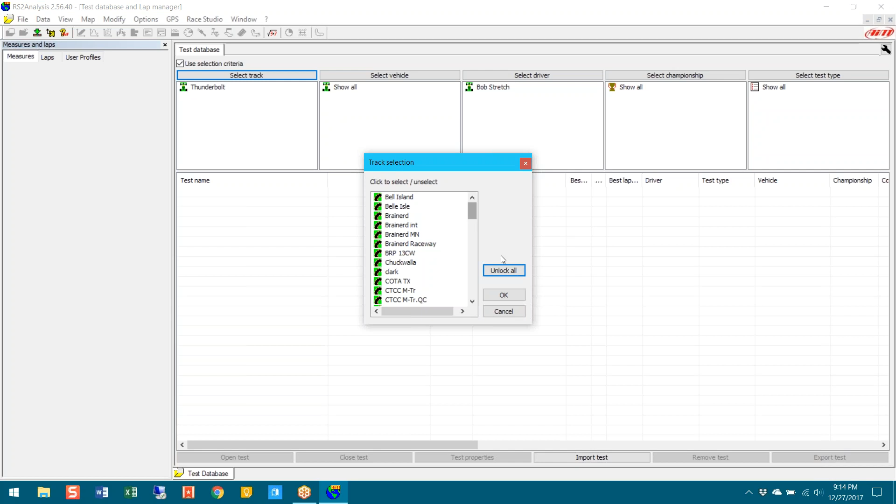The next part that I use a lot is this Use Selection Criteria button. That lets us really use the database function of the software, where we can go in and select a track. We're going to say unlock all of them, so we can start out clear of everything, and say we want to look at Watkins Glen. We say okay, then we don't have a vehicle selected, we say unlock all, pick my name, and we can see all the tests where I've recorded data when I was the driver at Watkins Glen.

What's pretty nice is when the column titles come in, you go, hey, what was my best lap at Watkins Glen? We look at it and we see 1:23. I know for me running the long course, that was never attainable because I don't have an Indy car. That one was actually a time the car broke and I took the NASCAR shortcut. But we can say my best lap there was a 2:14. And then we can jump into this data to analyze it later.

So this is just kind of a quick overview of how these areas of the software work and things that we can do with it. The other part I wanted to touch on quickly is one of the nice things we can do from this screen is right-click on a file and choose to email it.

So if you do that, it'll automatically open up your email program, and it comes up automatically with the AiM software email address. So it would send it back to Italy if it was a file you had a problem with that you wanted them to look at, or you can delete that and send it to a friend or whoever you want to share that data file with, and it automatically attaches all the files that you need with it.

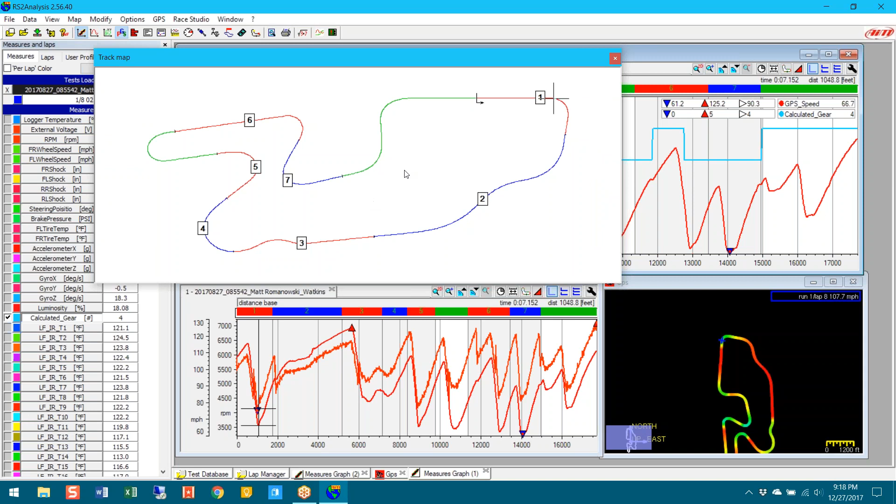And when we want to see that map, the way we do it is we go Map and then Show Track Map. And that'll pop up our map with all our segments. And we can scale that. And as we make it bigger, the numbers will show up on the map for us. Oh, that's always a tricky one. Where did it go on us? So we can see we have our first segment, second, third, fourth, fifth, sixth, and seventh. And we have our numbers that correspond to where that segment is.

This is a little bit of an art in itself, and we'll talk about that. But this is the segment as I drew it up, and I wanted to segment the track. For different tracks, I might have 2 or 3 segmented maps because I might want to focus on one area or one particular section. So sometimes if it's a track that has a special chicane, I might have 3 segments: the chicane I want and everything before and everything after. And then that lets me really hone in on a spot. And then I might have one like this that's split up a little bit bigger.

So the map and the segments become pretty important, so we can get to the segment analysis part. But I wanted to go through the screens of how we make this map if we didn't have one. So if we go to a track for the first time and we pull it up, we can say make a new map. And this is the map that AiM says fits this track. And we can see it has a lot more segments. Here's start finish. The little tick mark off to the side says that's the direction of the track.

And we see this one has, I don't know how many segments here. If we count, there's 12 segments. And they don't all make perfect sense. But Watkins Glen's a track where it works pretty well. And we go, well, this isn't too bad of an analysis, but we don't really get the entrance to the bus stop very well.

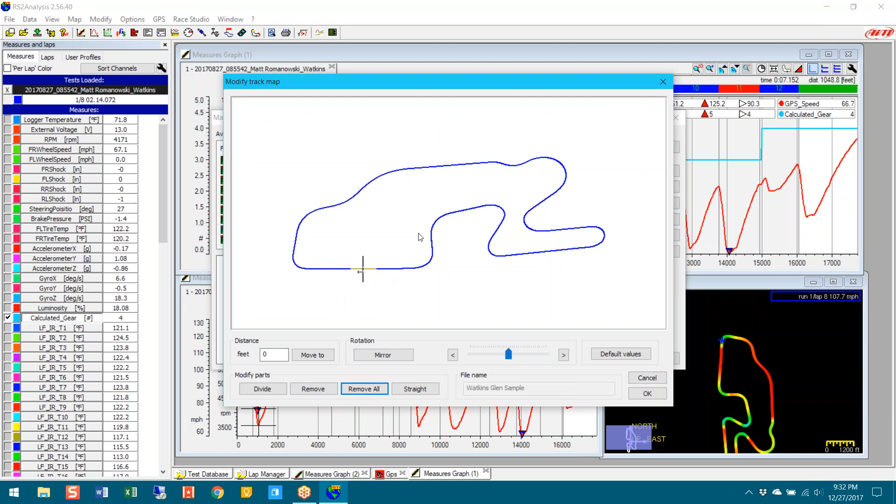We can remove a section, we can remove them all, start over, and do whatever we want. Or, here where we say, hey, we don't want to save this, we could just cancel it. We can also, when we get into the map manager here, do some nice things. We can come in here and say we can load this for all the open tests. So if we had 3 Watkins Glen tests that we wanted to look at, we can load this for all of them. We can delete a map, modify it as we talked about.

We can mail a map off to someone. So if you were prepping for an event or doing some post-race analysis and you wanted to share it with someone, you can mail it off. You can export it to save it if you want to attach to an email that way. We can import maps from someone, and we can jump into the map folder. So this is really kind of the map manager window and the different ways we can use it. And then the last part of it is we can say to just show the track map if we didn't have it open. And it goes through and it gives us all of our segments.

Are there not good maps available? So Mark's question, are there no maps available?

Maps, you can use the ones that AiM automatically generates, or you can use your own. For a little bit, I had hosted a number of maps that people had made, and they'd email them in, and I'd share those for people. But what I found a lot of times was people want their own, or if you want to focus on a specific spot in a track, people make their own.

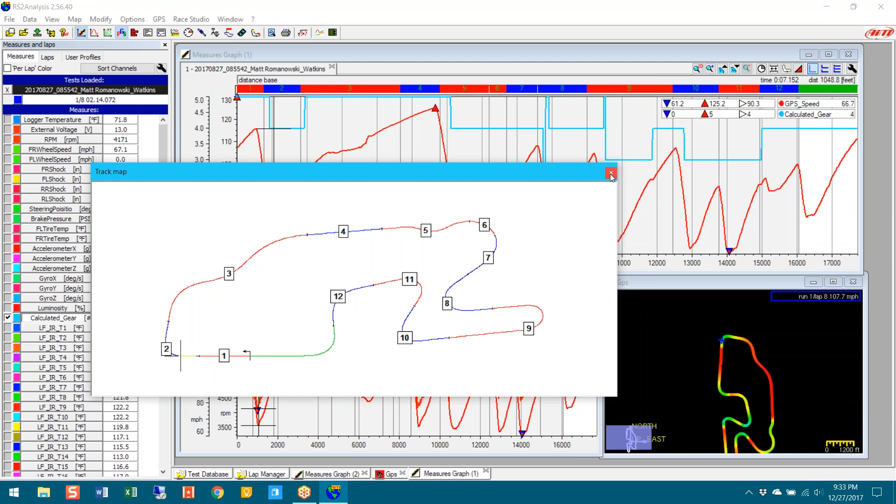And with the GPS, it becomes pretty quick to make them, and the maps are a lot more accurate. So I don't know of anyone that shares them a lot or kind of hosts them for everybody anymore. So you're kind of stuck making your own if you want something more specific than the general one that AiM gives you. So sorry, there's not too much more to help with that part, Mark.

The area where this comes in, and it's actually not something I have in my notes, but I think it's important because we just talked about what we do with these to make all these segments, is the segment analysis. We can do this a few ways. We can go to view and then down to the segment analysis, which I'm missing. This isn't the way I usually jump to it. So it'll show up in track line split times.

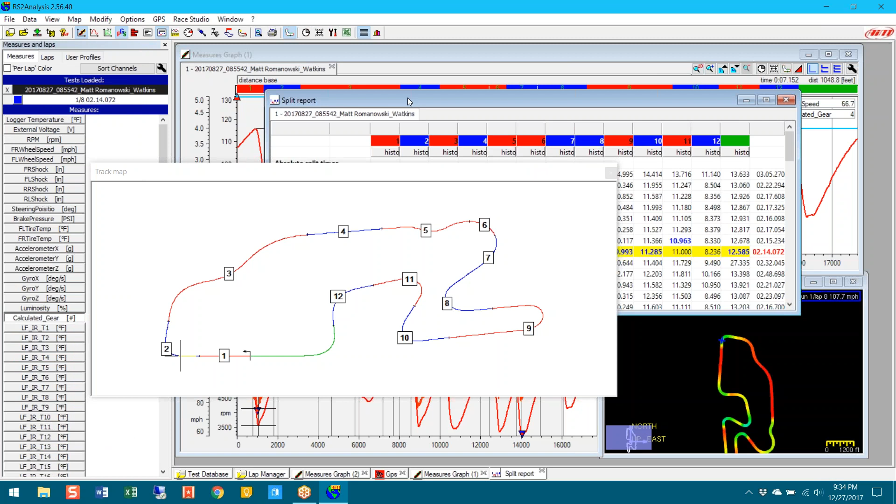So when we open up our split times here, let's just close that map. This gives us all those splits for that whole session. And there's a lot of data here, and this is a spot where we're going to jump into another webinar one day on how to get into this segment analysis much deeper. But what we see is if we show our track map here, this segment 1 is our segment 1 here. Segment 2 is turn 1, and we see it here.

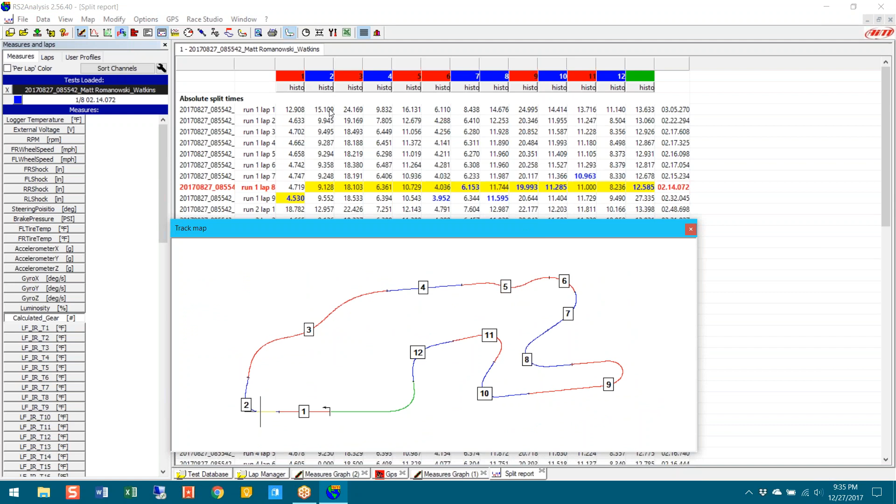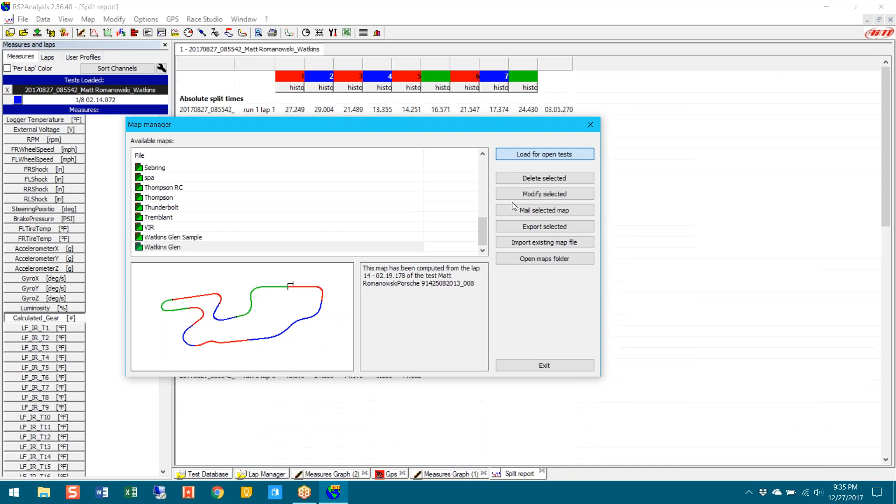So this is the way that we get to go through all of our own segments, and this is where the data shows up. And just to give you a quick example, if we wanted to open a different map and apply it, we're going to close this for a second. If we just look for a real easy one, we see it's 12.9, 15.1. When we load a new map, it recalculates all these and changes them to whatever that map file was. So now we see it went from 12.9 and 15.1 to 27 and 29. So you'll see different numbers as we change those segments.

And to give you a quick example where this becomes important, we can go in here and we're going to remove all our segments. And we're going to say, hey, we want to look at something really specific, maybe we want to focus on just the bus stop. So we're going to divide the track here and here, and we're going to change the color.

So now we're going to say we have the bus stop and everything before and after, sort of like the t-shirt that says racing is life and everything else before and after doesn't matter. Or here's our chance, and we're going to call it Watkins Glen bus stop.

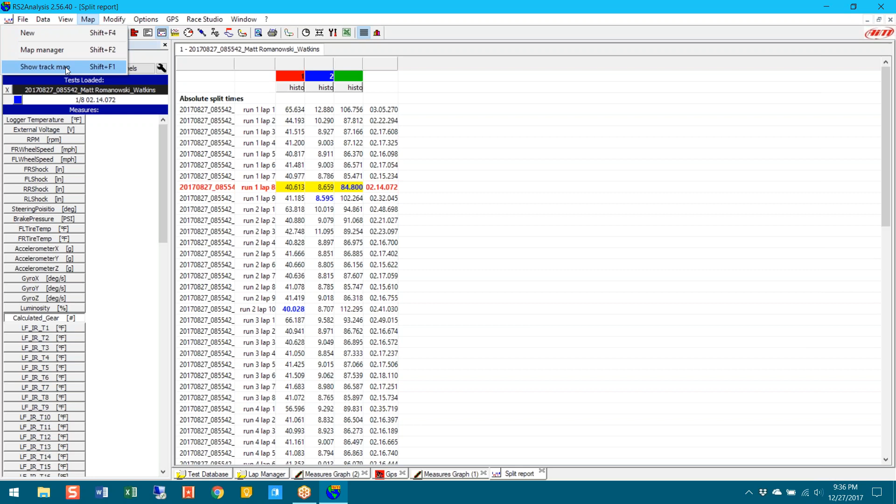So now if we open up that map again by going to map, show track map, we can see all our bus stop data. We can see there's some pretty big variance in here. We go from the fastest, which is highlighted blue by AiM, the 8.595. We got one that's 10 seconds, so 1.4 seconds slower, and we got an 11. We see some pretty big variance in here.

So it's a chance that we could really hone in and go, well, geez, what's different about the bus stop in this lap versus some of these others? Because it says our average was 9.199. So what do we have to do to go from 9.2 to consistently run basically an 8.6? This is the power of the data, where we can really dig in and figure out what's different. If we have a SmartyCam hooked up, we can jump into this session and say, hey, what did it look like when we did that versus some of these others?

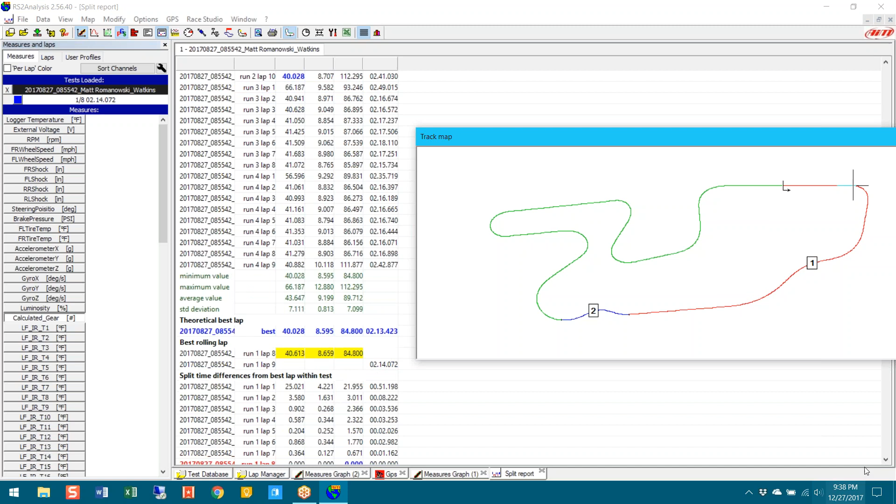We can go back and look at the brake point and the speeds and all those things to figure out what happened. So I don't want to get too deep in that tonight and take all our time there, because segment analysis is certainly going to be something we're going to focus on at another point, but I wanted to show where all of this segmenting ends up and where it's important.

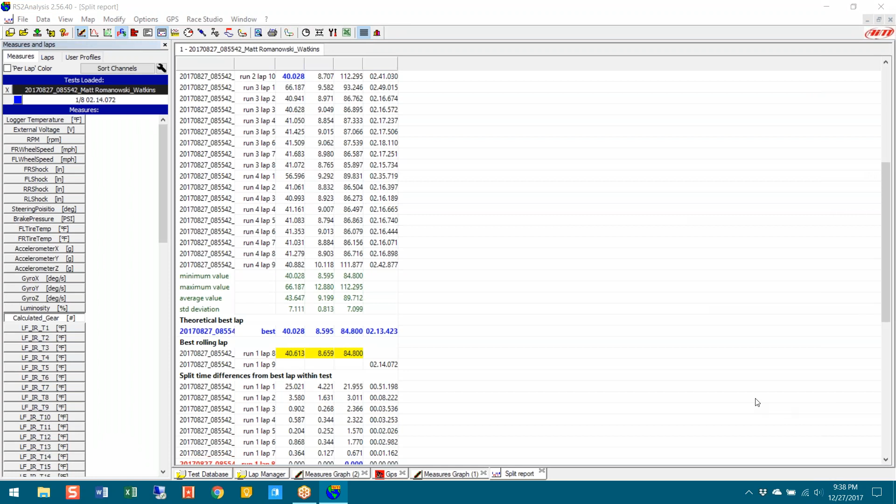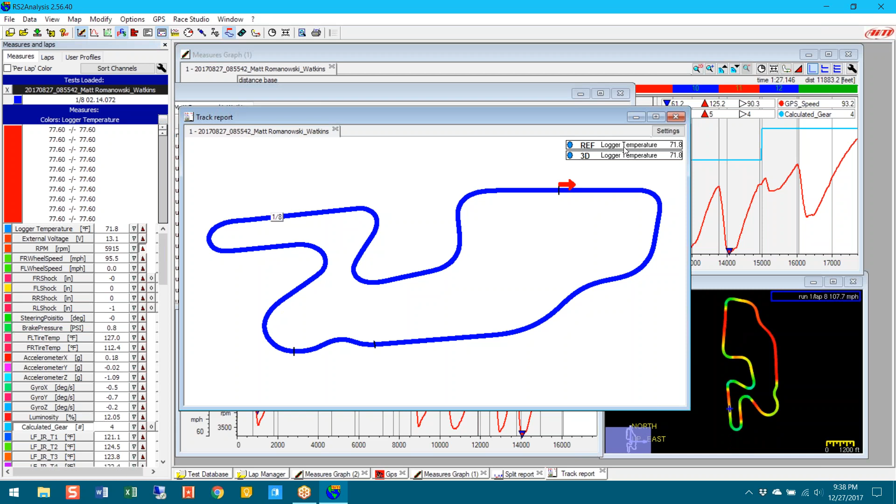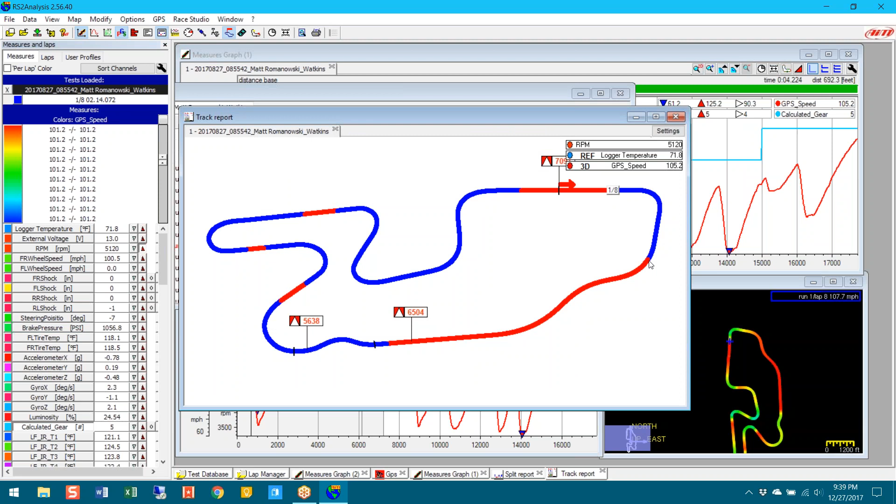The other quick spot I want to show you is when we look at our track report. I'll highlight that up here, the track with the little flag on it. When we open that up, and let me get this down so we all see it, is this track report, which we're not going to jump super deep into, but when this logs a value that we're going to look at, and let's just change these from logger temperature to say speed quick, is these spots where it can give us a value, and these breakoffs come from that segment map.

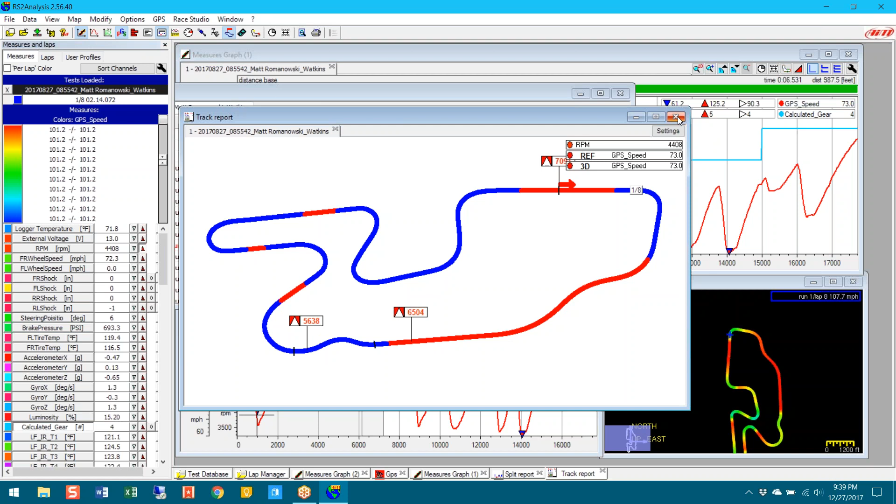And looking at it quick here off the cuff, our reference channel is what was throwing us off a little bit, but we can see that these flags that pop up are based upon the segments that we made before. That's where they come from. So it's another spot where that map does end up mattering. So I think that gives us a good idea of segments, and if people have more questions on that, type them up and we'll try to cover them tonight, or if we need to, we can do a whole other session some night on just the segment part.

But the next part I wanted to jump into was the Traqmate integration, because Traqmate now is no longer making systems. They're not selling anything. I've heard that they're repairing systems that are in the field, but I haven't heard of anyone sending them in. But one of the things that happened as they stopped making systems is that AiM purchased the rights to those data files and the file system and how it's constructed and everything else.

And what that ended up meaning is that we can now import a Traqmate file into AiM Race Studio Analysis, so we can compare it to an AiM file and look at it. So that really provides an opportunity. If somebody switches from a Traqmate system to an AiM system, or if they have a friend that was running Traqmate, they can import that data as well. And the way we do that is pretty straightforward. We go to File, and then we come down to Import a Traqmate file.

And I saved one to my desktop tonight, so we can go in. It's not showing up. I must have saved the wrong one. So let's see if we can find it quick, because I could remember where it was. Very good. Documents, data. We should have. All right. Here's an old file, and we won't dig into it, but we'll see how this works. We can pick one of these Traqmate files. Oh, we got one with an error.

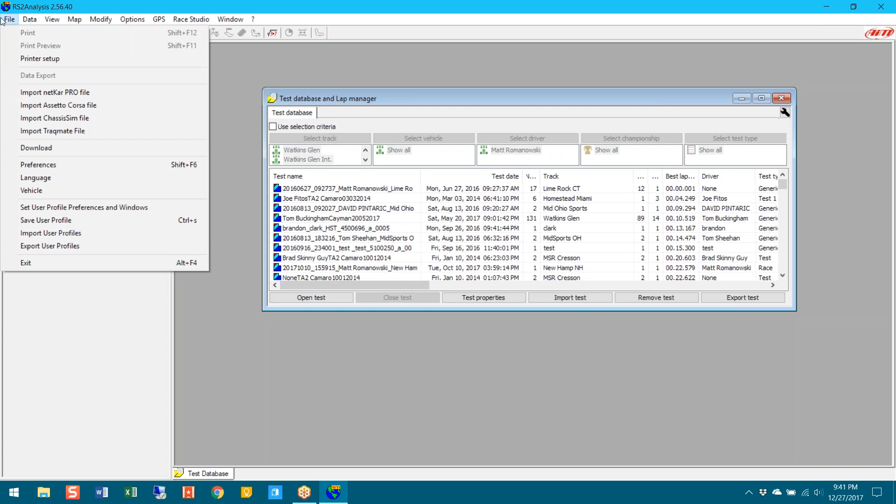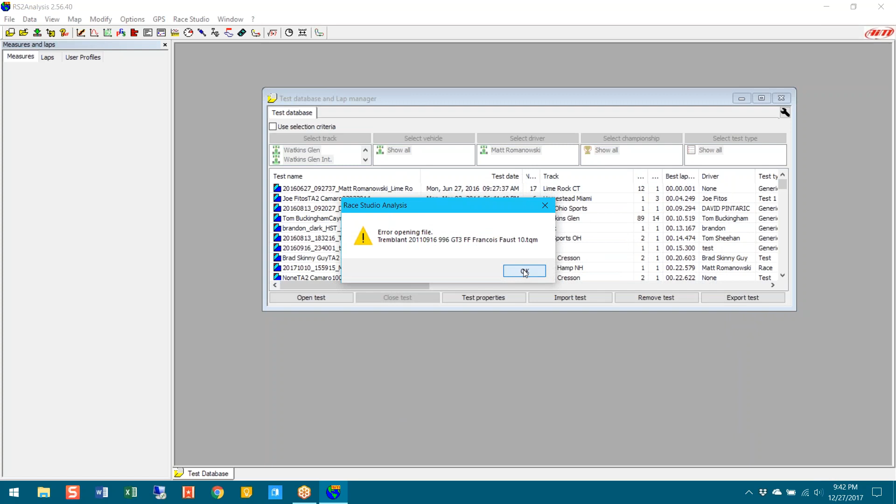So my plan tonight to show you this without double checking is backfiring a little bit, but we'll try another one and see what we can get for you. Hopefully we get one to work. It's worked in the past. It's not something that I do real often, but it's something that people are starting to use more and more. And I know Roger's had success with it in the past, and I've had it work before. So it's interesting that we're having some trouble, but we might not be able to show you, but you see the process of how to do that tonight. So sorry about that. If somebody has some files they want to try that with, or they have any trouble with, please send me a note and we can work on that.

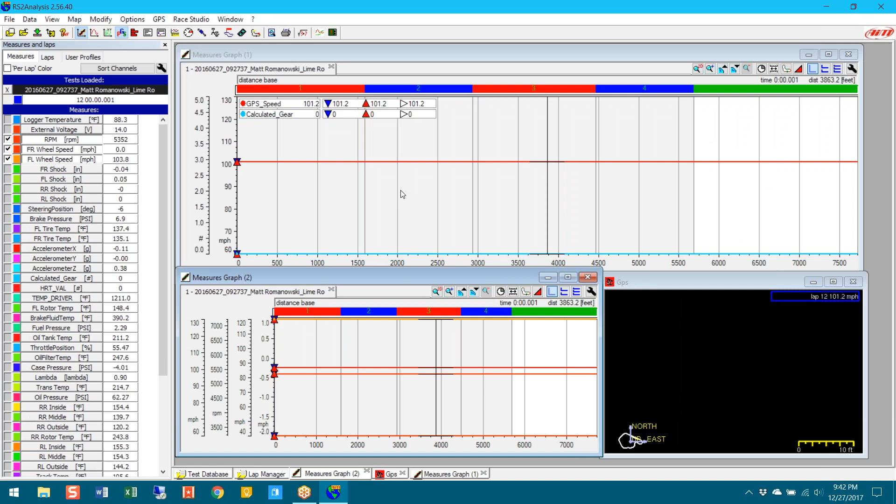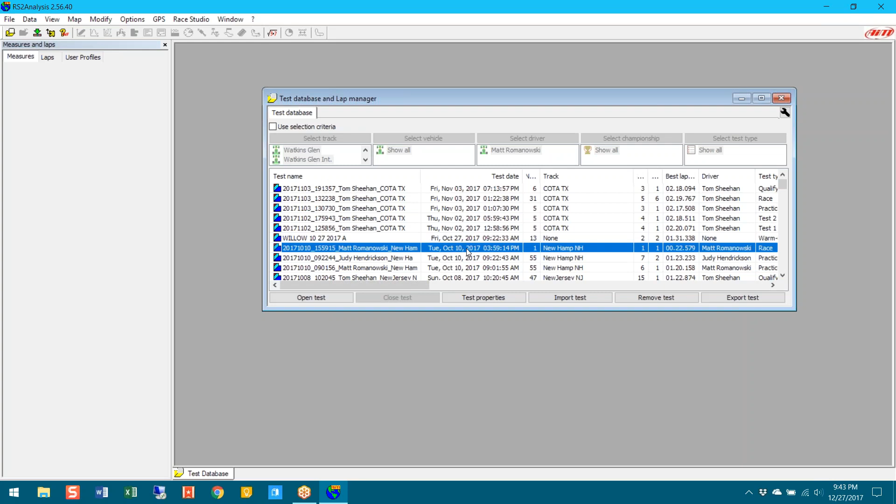Then the next thing I wanted to look at was an intro to the math channels and how math channels work. So I'm going to go in here and open up another one of my data files that's from Lime Rock. And this one, I don't know if I picked a good file. We can go back, use my favorite method of moving data around. We can open up a data file. We get some speeds in here. Oh, I'm failing on picking good files for you guys. Here we go. So now we have a better one.

We have our speed trace, our gears here, and we say, hey, we'd like to look at some math channels with it. So the two ways to get to math channels is to go to modify, or we can click the little square root button up here. My default, I always go to the button. And when we open up the math channel file, we get this window.

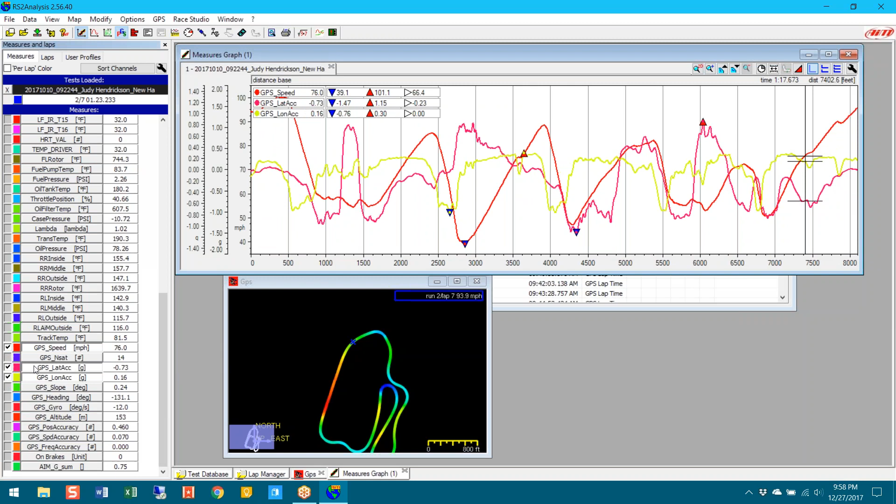So if we go in and we check these boxes, well, now we have a scale that we can look at these graphs. So we know a lot more now as we can say, well, geez, this is the amount of G-force that we're able to develop. But it's still kind of hard because all the graphs are overlaid.

Now what we can do is we can use the views up here, the three buttons that we have with the backwards L's. The first single one says that we're going to take all the graphs that we choose over here and put them on one graph. This is nice if we're looking at one or two things. Sometimes even with two, and certainly with three or four, it becomes too much information in one spot.

So then we can use the next one. Actually, I'm sorry, the third one. And that will put everything on its own graph for us. So no matter how many items we start adding, it puts them all on their own. This is a great way that we can display more information and have it all in a way that we can see and use. So we say, hey, we add more and more channels.

Here I put the altitude because sometimes that's a good measure of if the track's going up or down, and the topography that we're driving through. And with the Solo, if you have it plugged into your car, you'd even have an external voltage that you could look at and see. So we say, well, geez, this is pretty nice because now we have all these graphs shown on their own. And now we can really look at it and compare the points and do everything.

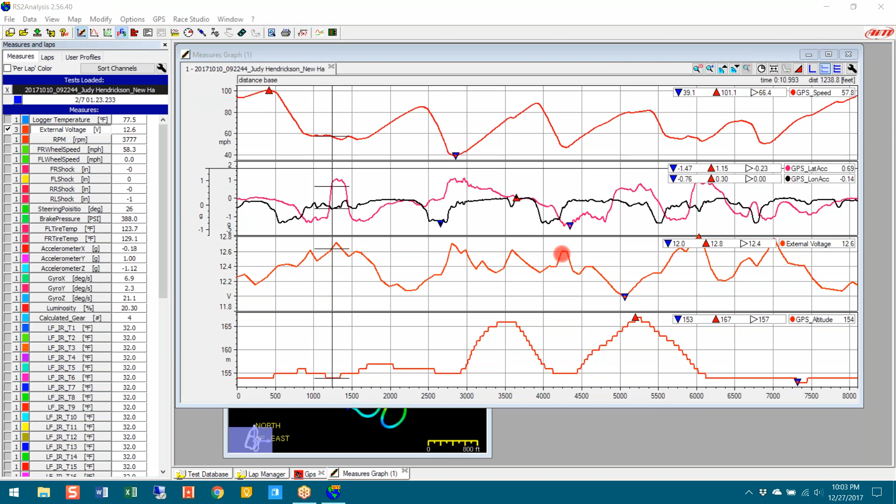Oh, yep. So the L's, if James has this right, is the L's up here, where we see right here. I refer to the L's, it's the views, that's what sets the 3 ways to go. So when we click those, the first one again is everything in one graph. And Mark, if you were comparing multiple cars or multiple laps, as Mark had put up, we're going to change this again for a minute.

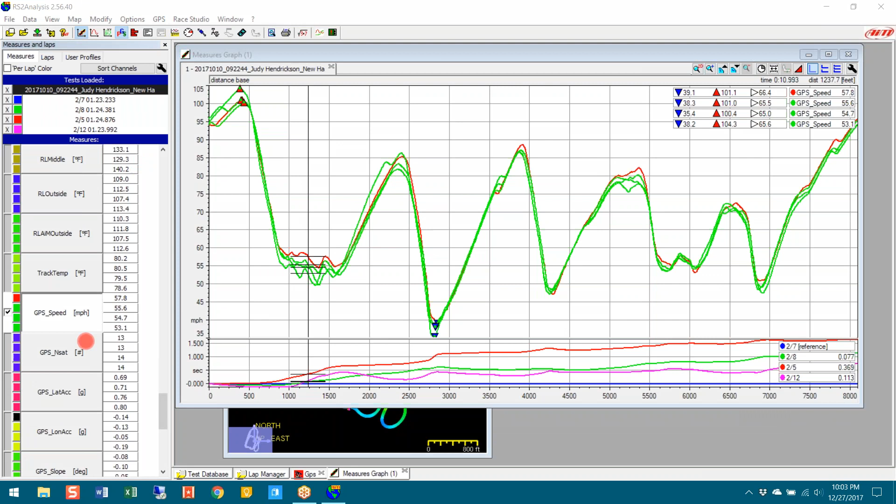Mark said when he does it, he changes the color of the graph to match the car. So what I'm going to do is just pick a couple laps here, and we're going to kind of go Mark's way. And I think that's a really good note of how to do it. Now when we pull up our speed, as we pull up multiple laps, we see them up here, and we see all the colors here. So we can go in and edit each lap's color.

For some reason, people probably laugh when I do it. I always end up with red and blue, because those are the colors that have good contrast to me. But any color works, and now we can see that we have all these graphs overlaid from all the laps, and if we had multiple sessions, we could have multiple cars and everything else set up. Right now it's just laps, and this is where we can dive into the data later on.

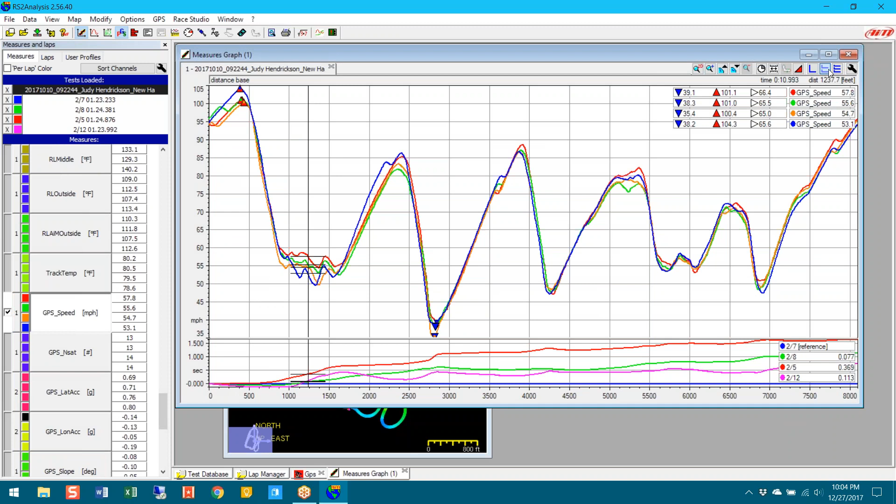And then when we go back up here to our view icons, the second one, I think, is where Mark had asked. That actually won't show up with this because we have all the same channel. But if we picked the accelerations again, it would go back to what we had defaulted, or we can put them all on their own.

So these views, again, when you get in there to your data, really get into these buttons and use this to your advantage to figure out how you want to display data to really look at things. It's one of the most powerful things that people don't use enough, I think.

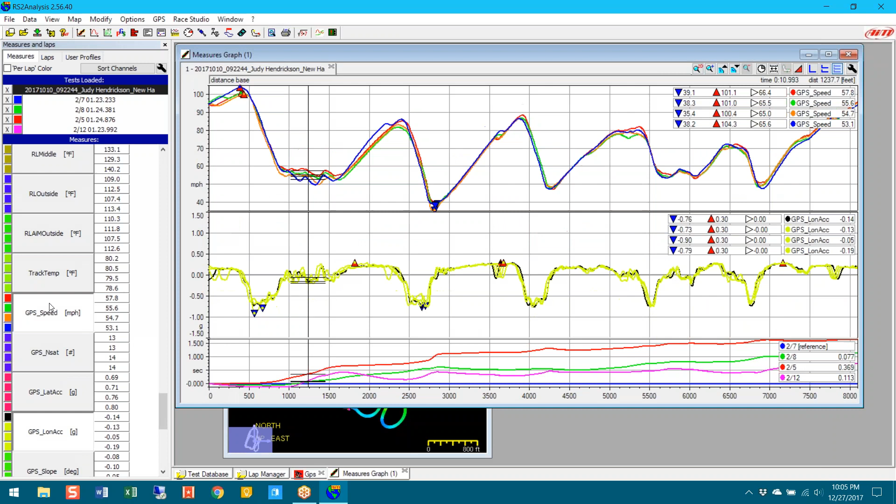Jeff has a question here. If I want to compare brake traces from 2 or 3 different laps for, say, one corner, how do I blow up the graph for that corner? Awesome question, Jeff. Here, if we had a solo, we'd look at longitudinal acceleration. Here we have a whole bunch of graphs. The colors don't work well.

But another point that Roger sent me a message about is we have this other option up here, per lap color. What per lap color does is it takes these color icons and applies it to all the channels underneath. So if we select that box, we'll see now that the blue, green, red, pink matches all of these channels down here. And I'm just going to scroll up to that first one.

We see the whole thing, so it doesn't look odd. And we see these colors here on the far left match these, and those match all of our items in here. So now we have our laps, and we can say blue corresponds to the 1:23.233, and we can match those up. So now to get towards Jeff's question, we want to look, this is turn 1. How do we get into there?

There's 2 ways, Jeff. The way I use the most is I always have a scrolly mouse, or even on my laptop, I use the scroll pad. If you click to an area and then you use the scroll and you scroll in, it will zoom. So that's what we saw here.

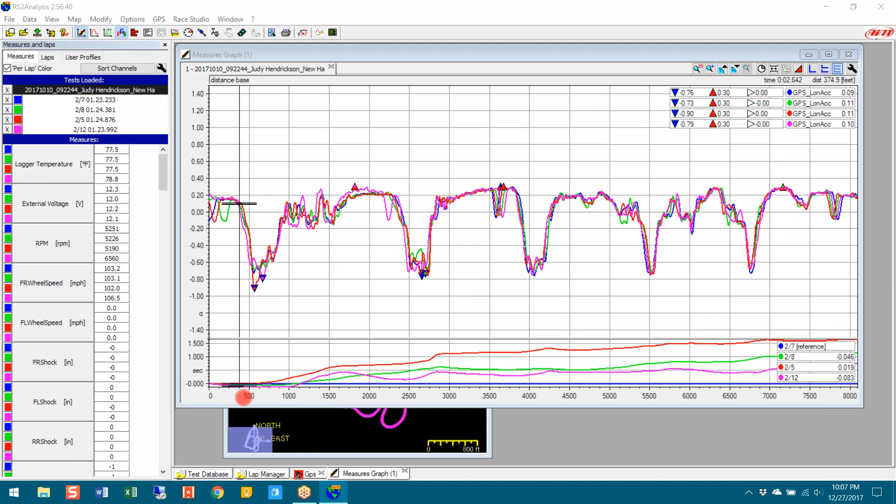And if we go back, I can show you, if we look down here, we're working in distance mode, and we see 0, 500 feet, 1,000 feet, 1,500, and as the lap goes on to a little over 8,000 at the end of the lap. And when we click a point and we start to zoom in, notice the scale is changing. Now we're 2, 4, 600 instead of the spread we had before, and we can zoom in more.

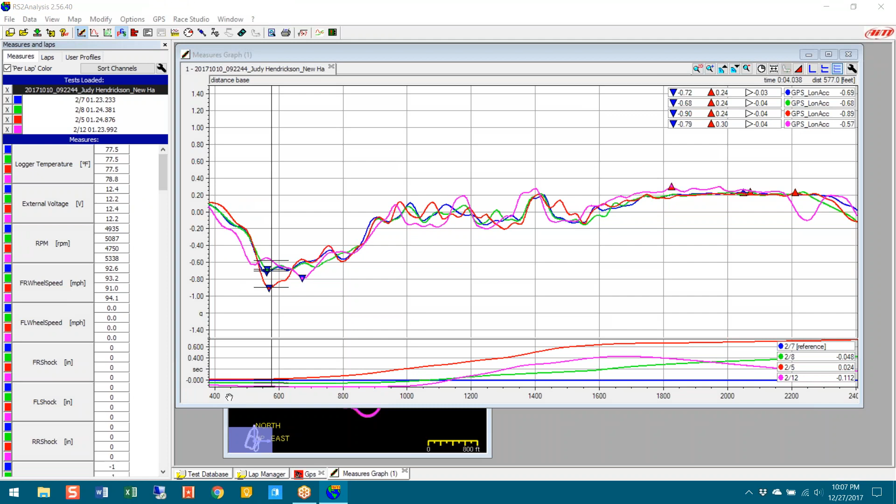Now you'll see we started to zoom out of the space we wanted. We're not seeing the initial hit of the brake at the end of the straightaway. We can see we're at 400 feet past start finish. What we can do is if we click on the numbers graph, the distance graph at the bottom, we can drag it to the side and recenter our information. So now we're back to seeing this is where we hit the brake. This is our brake application and the trail off.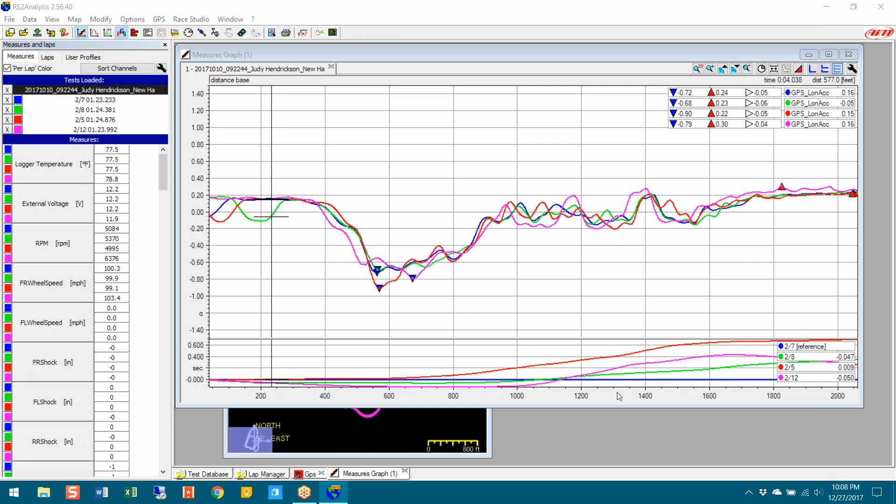The other neat thing that we can do with this is as we look at our GPS map, and Mark, to your point, I think it was you that had asked, do you have to have the GPS or is the GPS better? Well, one of the great things is now when we click on a point, and I'm just going to move these windows around so we can see everything at once, the GPS point on our GPS map right here matches our data point.

So if we want to compare the brake application, we can say it was here, and this is in relation to turn one. So it's a nice feature that we can see right on the map where we are without having to guess or anything else. And we can say, if we came back to where the longitudinal G's got back to 0, that's the point that we were all the way off the brake, that we really finished our trail braking. And we can zoom into that point more if we want.

We can scroll in and really get down there. We can also scroll out and see that point on the map. So my favorite way is to use that scroll, Jeff, to get back to the exact zooming part. The other ways that we can zoom are with the zoom functions up here that I use far, far less, just because my habit of using the computer is through the scroll wheel and the mouse.

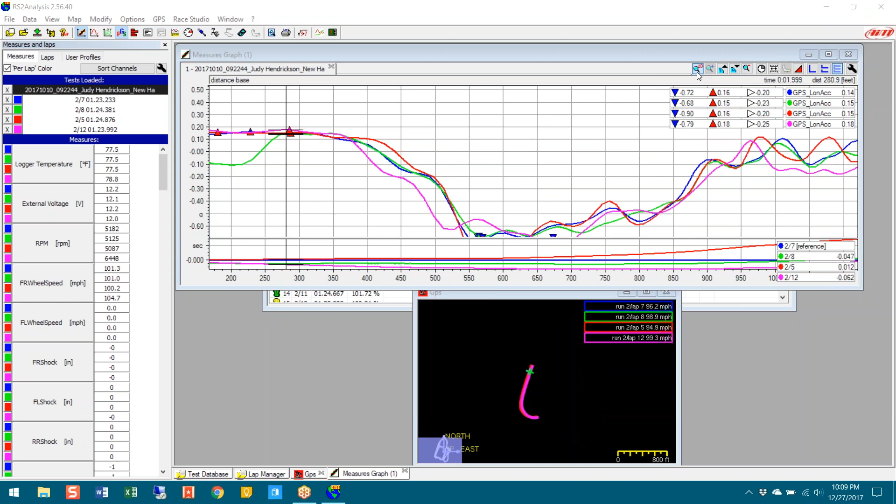But these zoom functions work very similar. We have a 2D zoom that we can select an area and it'll zoom into what we did. And you'll see when I did that, I did not select the whole area. So let me go back for a second and I'll be able to get this in here for you a little bit better. We have our turn one. So we're looking again, here's turn one. And we say, geez, we want to zoom in just to this point.

So we can pick this 2D zoom, which is a great tool, and I probably should use it more. And we can highlight the block that we want to look at. We can make it bigger, smaller, whatever that space is. And when we let go, it zooms us right into that area. So now we have everything we were looking at.

The one trick when we use this is that we have to click out of the 2D zoom, otherwise we stay in it and we get really frustrated that it won't go away. I speak from experience, so then we go back to the 2D zoom and toggle that button off. And you can see, hopefully, when it's selected, it looks like it's depressed. It's a fine change, but it is a change. And then when we turn it off, hopefully you can see it goes back to the regular gray and it's not highlighted anymore.

So now that we kind of made that mistake and we say, geez, we're so zoomed in, when we look at our distance graph, we're down to 2 foot increments. We can't get any good data for a general view from this. So the way we can zoom out, my way is to simply scroll back out with the scroll on the mouse. We see that working. We can also go back to our zoom buttons up here and use them.

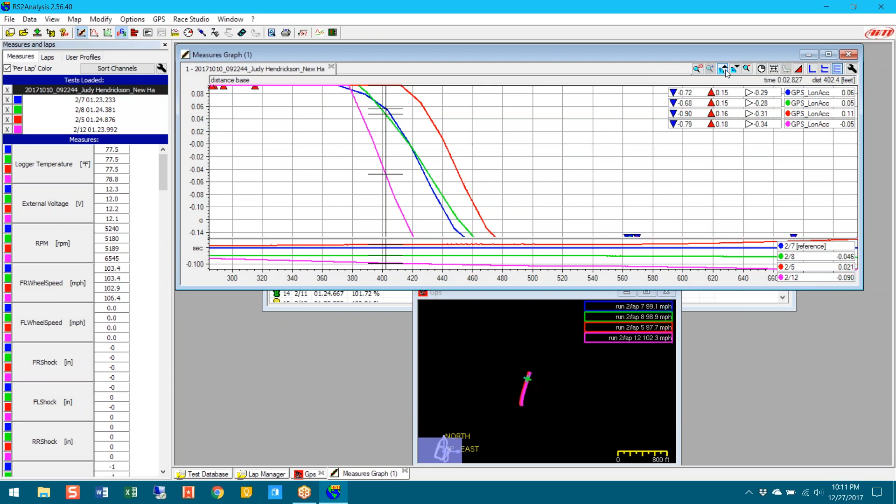One of the nice parts with the zoom is it gives us a chance that we can go through. It gives us the display of what it really is right underneath.

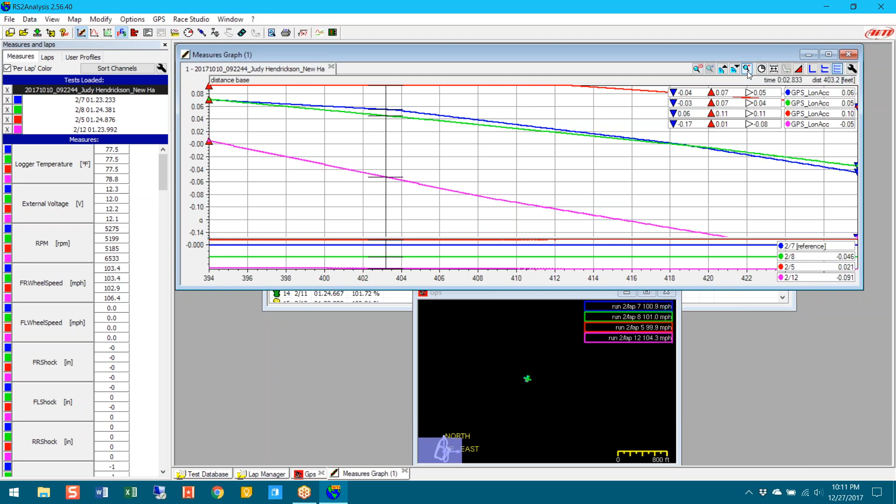It's funny, before we started this, Roger and I were talking a little bit about hotkeys, and it's something that I don't use in this software a lot. I'm not a huge hotkey guy, but one of the things we can do is we can zoom out to the one lap, and we can use that button. It puts us right back to one lap. And then we can use our up and down keys to work on zooming into sections.

Not something I do as much, but something you can do, or you can use the zoom buttons here and zoom into a section and drag you in. So hopefully, Jeff, that kind of gives you a way that you can get into those specific places that you want. The one I use there the most is the 2D zoom, because I'll look at it and go, geez, I want to get into this corner. I can put everything I want to look at in the box, and then it brings me right there.

Mark says he likes the tall graph to make the differences stand out more. I think what he means is just to get the scaling probably where you want, and that is something that helps a lot. A trick there is when you grab the graphs on the side, you can right click on them and move the graph around some as well, or there's other ways that you can do it.

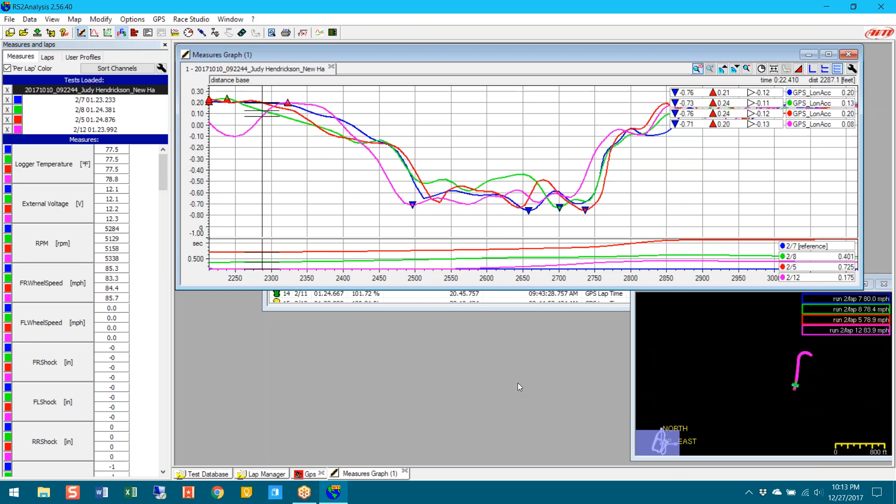So Mark's saying move the track map to the corner. I'm not sure I totally follow, Mark. Let's see if we go back to a full lap. I think what he's talking about, Matt, is sizing the measures graph all the way to the bottom, and then have the map off to the right side instead of sharing half vertically. Gotcha. There you go. So then pulling it down, he gets more granularity. Kind of go this way.

The axis. Yeah, that's a good way to do it, and to go with that, one of the things I think that helps people a lot is we can double click to auto scale it, or sometimes if I'm looking at just lateral acceleration or longitudinal acceleration, I say, hey, I really want to look at braking. What I'll actually do is go into my channel over here on the left and right click on it, and that's how I open this.

Let me go. I have my webinar window here. I got to get out of my way and just exit.

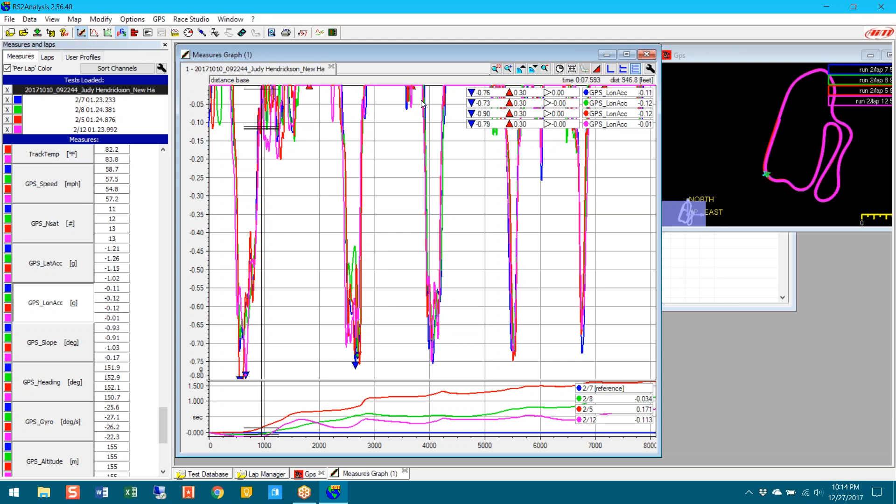So if you go back to your channel that you want to change, right click and it pops up the properties for it. So one of the things I'll do with longitudinal acceleration, if that's what I'm working with, is instead of having 0.35 as the maximum, I'll change that to 0. And then we say apply and exit, and it just gives me that little more scale. So I say anything above 0 is acceleration, so I can kind of block that off and not look at it, and then just say these are all my decelerations that I look at. For me, that works pretty well.

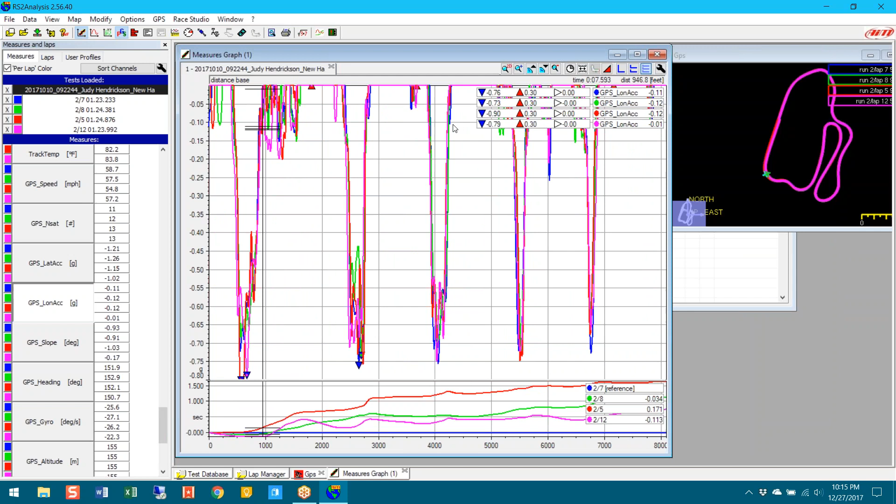The only thing that I say with a little caution there is as you scale your graph sizes left and right, sometimes it spreads the graph out and it can change how you look at things. So I always set my screen up that I use the full width kind of this way, and I don't know why I never really thought about doing it the way Mark had suggested, which I think is a good way too, and I'm going to play with that some.

But you kind of get used to looking at it in the scaling that you've become accustomed to. So it's a good chance to try some things out and just get used to it and not get caught off guard thinking something is wrong when it's really just a little bit of a different view.

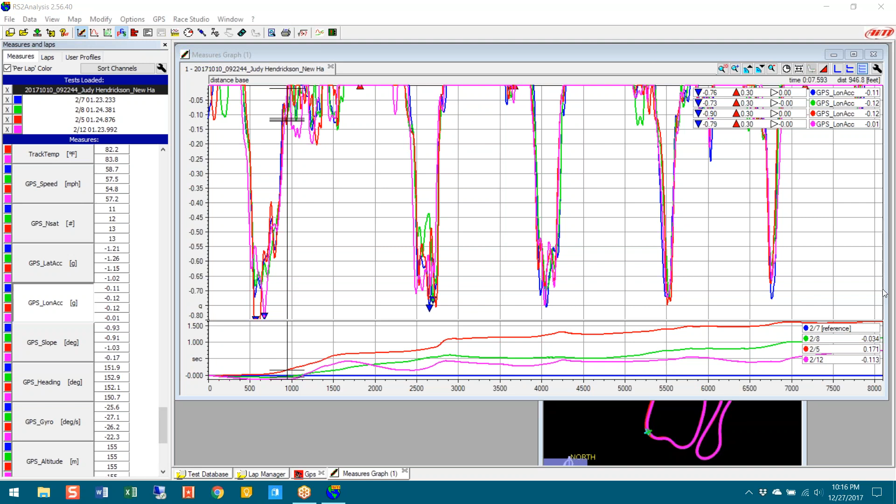Great question. So when we jump into our GPS map, we can see here that there's a number of lines and we have all our points. If we look, here's our point on the graph that we're looking at. We can see there's different colors in here. And what we can do to look at that, and this isn't something I use a lot. I like to go to video more than I like to look at just the GPS line.

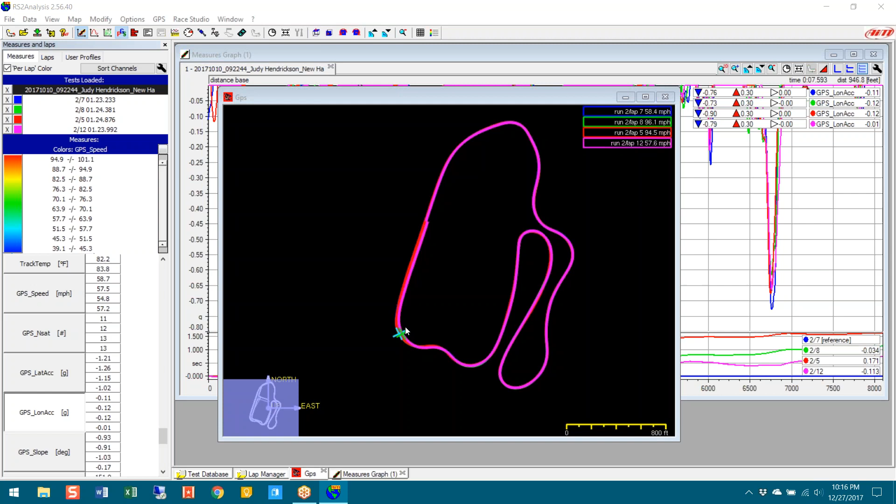But again, we can scroll in and zoom into these points. And this gives us, we have our scale on the bottom right that gives us the distance change, and then we can see where that is here. For people that know this track at NHMS, there's a lot of room. It's a pretty wide corner. So one of these I was probably trying something much lower to see if it worked, or maybe I was on a pass or something like that. But you can jump into this and see the difference in the line.

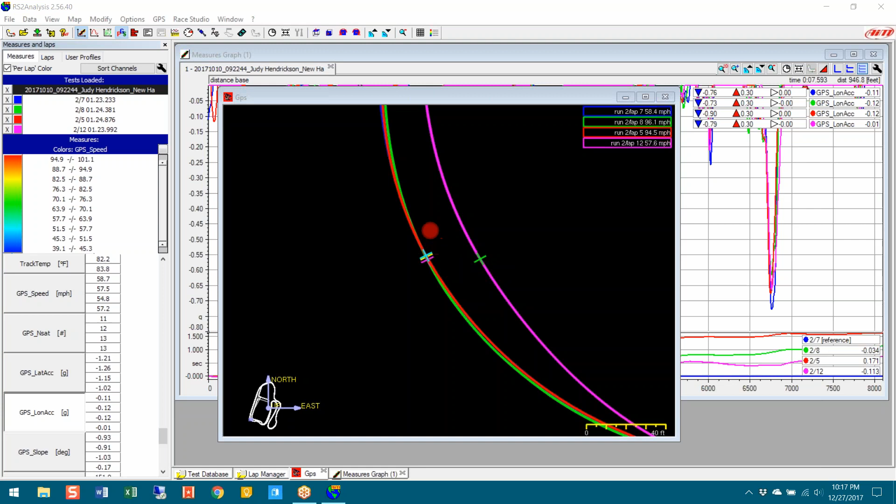And as you do that, one of the tricks that Roger had taught me, and he goes over in his class, and I think it's a pretty neat trick, is up here is the rotation for our GPS map. And this takes a little bit of a knack to get into, is as we rotate our map, we can rotate it and then drag it to match up with our scale. So you see what I did here, again, is these buttons rotate, and then as we rotate the map, we can lay it over the scale. And now we have an easy way, we have like a built-in ruler, basically.

So if we go back up, we can see, you know, we can bend these around. We kind of get them lined up pretty good. And then we keep zooming in. And as we do that, you see our scales down to 20 feet. And we can get in here pretty deep. And let's get it down. We got 18 feet. You know, where we can keep zooming and really fill the scale up. So now we got a pretty good one, right? We have 8 feet on this scale. So here's halfway, 4 feet. So we can say, you know, these 3 lines were within 4 feet.

These two, if we look between red and green, we're really within about a foot, maybe just a hair over, and in total about 4 feet. And then we see we get that other one that's, I don't even know if we'll get it on this scale. Yeah. So now we can say that's, what, 16, 20 feet off or so. So hopefully, Jeff, that kind of answers you how to dig in and look at the fine points of the line and zoom in.

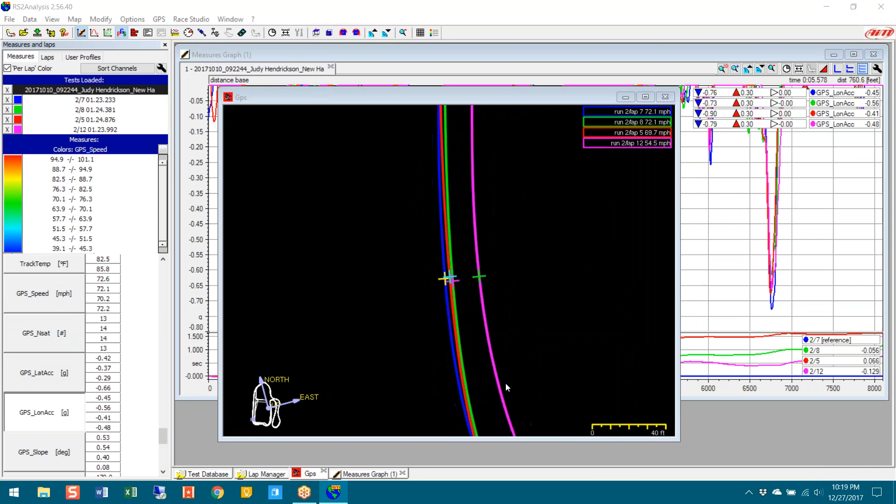And again, we can scroll in and out on these, or let me highlight here, we can use the zoom buttons. Like I said, I default to just scrolling with the mouse and then dragging things around. But you know, what's sort of interesting is we look at a track and we scroll around here, we see certain areas like the apex, you know, you get down and they get pretty close.